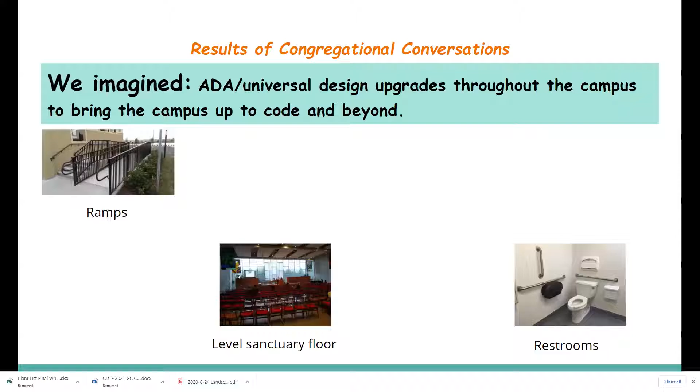So we had conversations with the congregation, and here's what we imagined. First of all, we imagined ADA universal design upgrades throughout the campus to bring the campus up to code and beyond. We imagined more ramps to all of our buildings. We imagined more ADA restrooms than just the one in the main building. We imagined a sanctuary that had a level floor that was accessible from all areas.

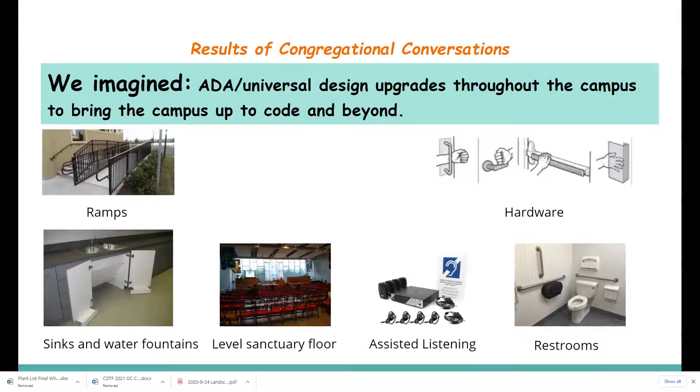We imagined hardware and other upgrades that were accessible. Sinks and water fountains that could accommodate a wheelchair. Assisted listening devices. And a playground for our children. We also imagine an aesthetically beautiful campus that serves our mission. An upgrade to the Jesus window. And I must say, these images are not from our church, but they are imagining into the future.

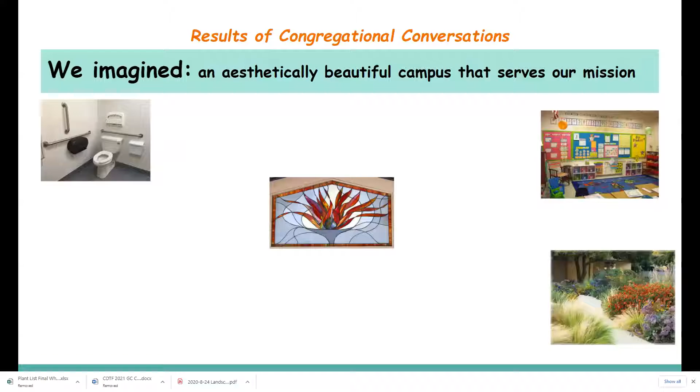Even more restrooms, not just ADA. Wonderful classrooms for our children, but also for the preschool that uses our facilities. Wonderful landscaping, meeting areas and rooms for our youth to meet, an updated social hall, an updated kitchen, efficient heating and air conditioning units, solar panels, storage that was upgraded and really met our needs, painting outside and inside, new signage,

a monitor so that we can better see the hymns and different things during our worship service. Meeting rooms, updated seating in the sanctuary that got rid of our pews and added chairs, which are more flexible in terms of the use of our space. Some art for the sanctuary. New windows that are energy efficient. Let's see, what does that one?

A labyrinth, lighting on our tower, a wonderful entryway, a memory garden, classrooms that could be divided depending upon the size of the crowds gathered, storage in Beck Hall, and finally a new system for our name tags. Then we had a reality check.

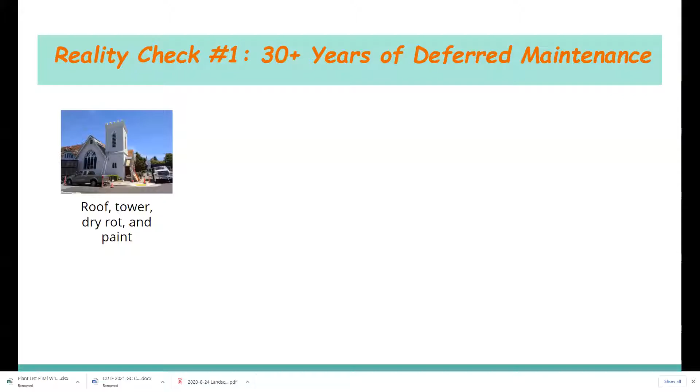Another project would be the stained glass windows. This is a specialty project that's not really within the wheelhouse of most contractors. And these are some of the crown jewels of our sanctuary. And we decided to address these because it was necessary to address some of the deferred maintenance on these, which had not been done in at least 30 years, and address these as a separate project because we knew we would want to get this done anyway.

That project is now complete. The stained glass windows are in the best shape they've been in for decades. And we also managed to replace, if you'll recall, the old diamond motif stained glass windows in the sanctuary and in the narthex, what we called the Harlequin windows, and they now better reflect the overall design of the main windows. That project is behind us.

Talk about prosaic reality. We had a small blockage in the sewer system that developed into a large blockage in the sewer system that developed into the sewer backing up into the RE building. I don't think I can stress that that's not a good situation. We addressed that. This is a project that well exceeded the typical budget that could be covered by the annual facilities budget. And it turns out that the actual blockage, as always, was in the worst possible place, which is in the line buried under Beck Hall. It was an expensive repair, but thanks to Diana Candy, that is complete and all is well.

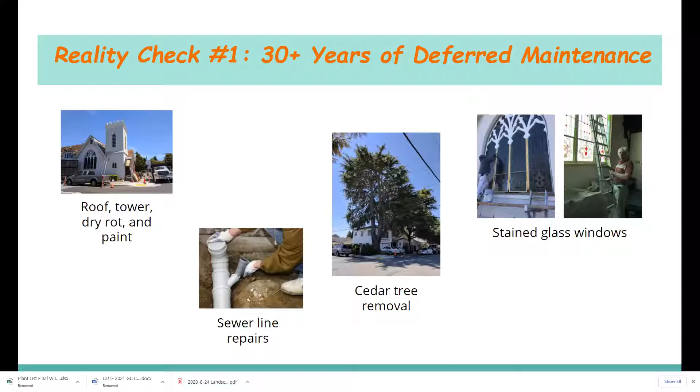The Deodar cedar at the corner of Ramona and East Santa Inez has always been a head scratcher for us. We like trees, but this one had outgrown its usefulness. It was completely out of scale to the building beneath it and any likely building to replace 314. More problematically, it was dropping limbs and it was impacting the roof and putting holes in the roof of 314. And so it really was a safety hazard to life and limb and to the property. And after a lot of discussion and multiple bids, we removed that cedar tree, which coincidentally kind of opens up some of the design constraints that that tree represented for any new building.

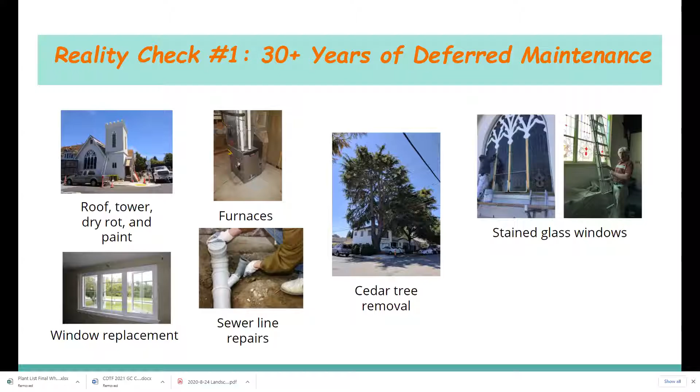We have two furnaces in the basement. Talk about prosaic. Out of sight, out of mind, but you know it when you're cold. The best we can tell, these are original furnaces dated from the 1950s, and it was becoming increasingly difficult to find parts for them, and they were increasingly cantankerous. And the estimate that we have is that they were about 50% efficient. So we just decided to replace them. Again, this is an item that well exceeded the annual facilities budget. And so we used capital campaign funds to do this. That project is now complete, again, thanks primarily to Diana Candide. And we were able to replace them with 2 state-of-the-art furnaces that are over 95% efficient. That project is complete and behind us.

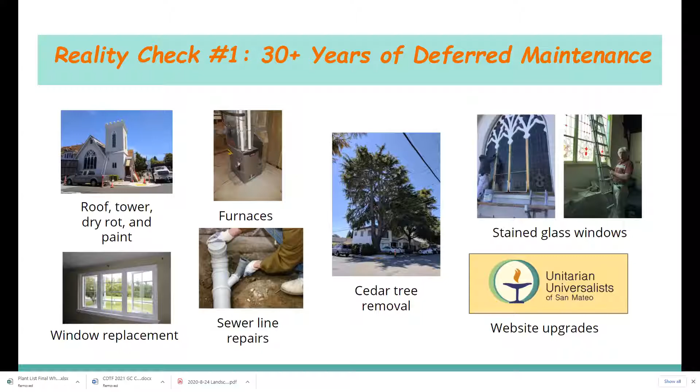We also devoted some funds to the website upgrades, which Sheila Sandow took charge of. The previous website was felt to be a hindrance to communicating with our members and the many changes that we're anticipating. And also it was a hindrance to, we felt, drawing in new members. And so the decision was made to spend some capital campaign funds on upgrading the website because there simply was no money in the budget to do that. All of these projects now are complete, and Barbara will discuss briefly what these items cost and how they are going to impact our budget going forward.

So the other reality check was with 314. Some of you may recall that the original plan was to remodel this building into the Swiss Army knife of spaces, where it could be a rental unit, it could be a minister's study, it could be an intern minister's studio apartment upstairs. We could use it for offices. We weren't sure what we were going to do with it, so we were going to remodel it to be the most flexible space that we could imagine within the constraints of the footprint of that building. We're also planning to build a new minister's study that would be a small but purpose-built facility behind the house where the dilapidated garages are now. That would have something that would be closer to a state-of-the-art meeting space.

The more we looked at this building and the more advice we got from the contractors that we met with was it would cost more to rehab that building and still be seriously constrained with what we could do with it than to just put up an all new building. And so 314 segued into our plans for a new purpose-built state-of-the-art RE building.

Not really going to talk about that in this presentation. It's an entirely separate project. We're really just going to talk about the improvements that we are planning for what we're calling the main campus, which is the sanctuary building, the RE spaces, and the office building.

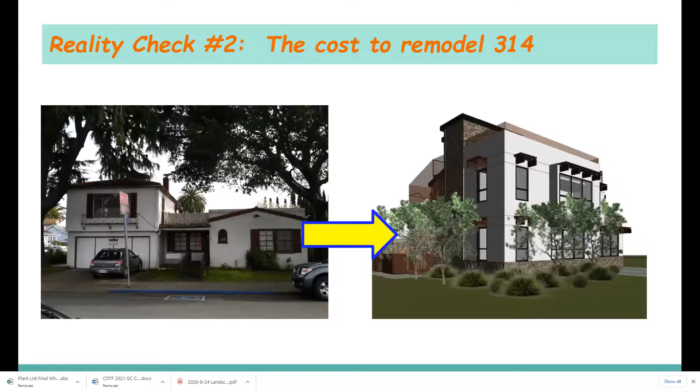Both for budgetary and programming reasons, we're not going to be able to effect the changes that we want to all these buildings at the same time. The permit that we have before the city right now covers all 3 of these buildings, but we have divided this project into multiple stages. And so I'll briefly discuss how we see that going forward.

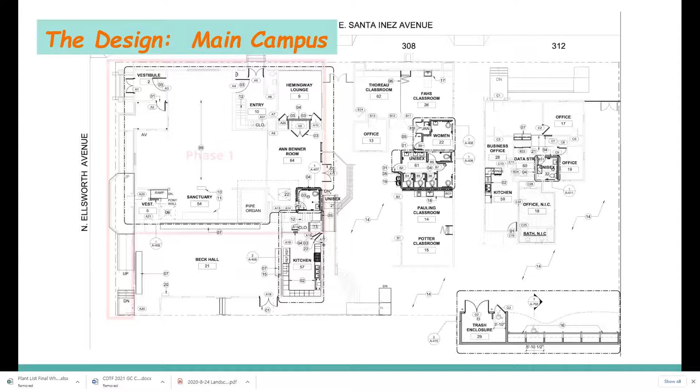The first phase is going to be the sanctuary itself, basically everything except Beck Hall and the kitchen. That's going to be our primary focus. The second phase, or what we're currently calling phase 2, would be upgrades to the office building. It might not necessarily be the second phase that we undertake.

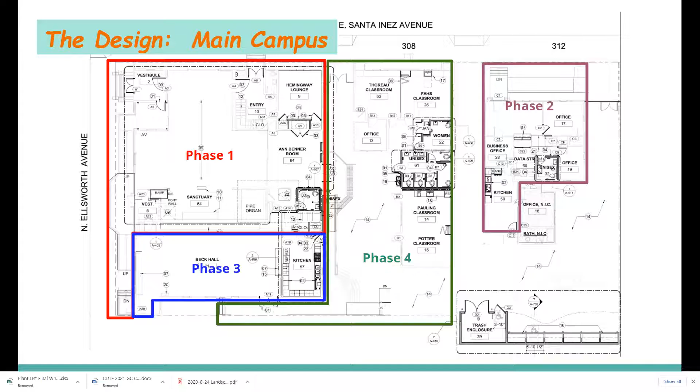The third phase right now is envisioned to be Beck Hall and the kitchen. The fourth phase would be the RE building and the adjacent courtyard. And finally, but not necessarily last, because it could be concurrent with some of the other work, would be the landscaping behind the lot at 312.

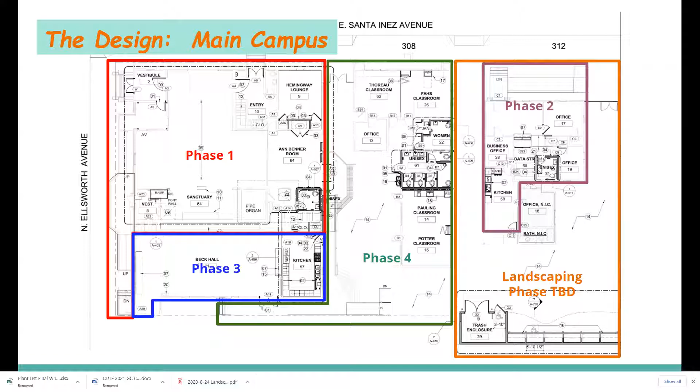And so now Barbara and I will review some of the bullet items that are going to go into these 3 phases to see how your thoughts, your suggestions, your vision for our spaces were incorporated into our plans for these rooms. There are some uncertainties here. There are always uncertainties in construction.

A big one is, when are we going to get our building permit? The permit has been in front of the city for almost a year now. It is a subject of negotiation between the city and us, the owners. This is not unusual, but a lot of this is out of our hands. The city's ability to process permits has been really slowed up by the pandemic. And some of their requirements we think are unreasonable, and we're in negotiations with them to have those modified. We think we're close to getting a building permit, but we don't know that.

Will a phased occupancy of this space be okay? As mentioned, we're putting in for a building permit for all 3 buildings, but we don't anticipate doing the work on all 3 buildings at the same time. That's typically not the way it's done. Will the city allow us to move back into the sanctuary, knowing that the other phases have not been complete? There's precedent for that, but by design, we are not going to ask the city now, because we feel like it would be opening up too many questions that we're actually not able to answer with any specificity right now.

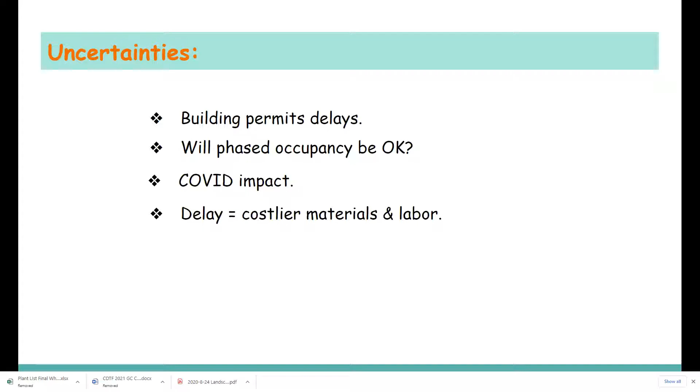The impact of COVID is ongoing: the availability of contractors, the ability of the city to process our permits, and also materials. That leads to delay, and delay leads to increases in materials and labor costs. And finally, how to fully fund our dreams. Because as you're going to see, after we went through the visioning process, our new plan is going to cost more than the funds we have on hand. And we'll talk about that a little bit more going forward.

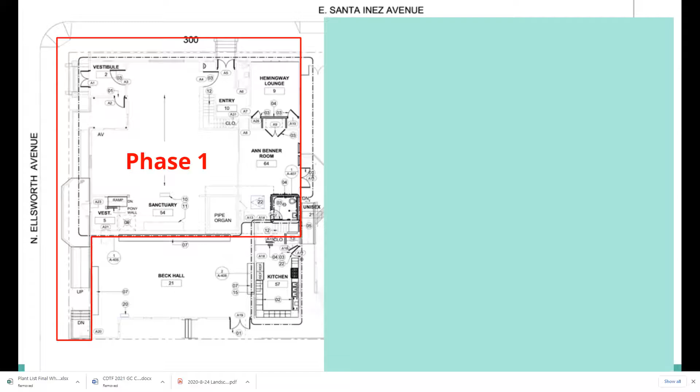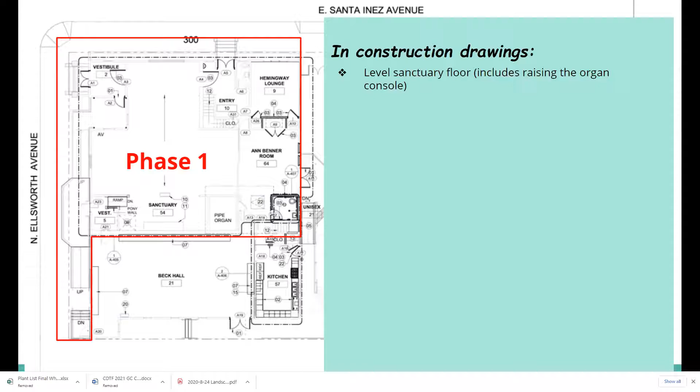Thank you, Barbara. So I'd like to just briefly step you through the main items that are going to go in phase one. So again, the red outlined area is the main building, and that would be encompassed in phase one. A big improvement is to level the sanctuary floor to facilitate a more flexible use of that space, perhaps including things like formal dinners, weddings, and so forth, and just to facilitate different kinds of services for our own use.

ADA is a big driver of this project. Barbara's cursor can show you the large ramp that we're envisioning for Ellsworth. We'll enter into a new ADA powered door into the narthex there. And there will also be a new ramp connecting currently the chancel down to the choir room. Again, that's a requirement to make that space ADA accessible. And we're also going to have another ramp leading from, I'm sorry, it's this one. Yeah, down to Beck Hall from the Ann Benner room.

An early improvement we wanted to make was to put an ADA restroom finally into the main building. We spent a long time, much discussion about where was the best place to put that in the building. And we kept going back to the corner of the Ann Benner room as being the best place. And that is where it's going to go.

Oh, I'm sorry, we've got a delay here for some reason. Oops. Here we go.

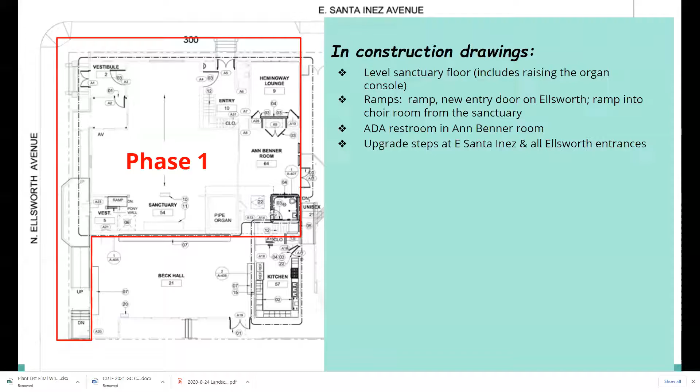We're also envisioning some steps or upgrades to the actual four entrances to the main building. There at East Santa Inez and over on Ellsworth there on the corner, the choir room entrance, and then in Beck Hall. Those landings would be completely rebuilt. So not all will be strictly ADA, but they will all be more ADA friendly.

Storage is always a problem. We are going to claim some of the room in the Hemingway Lounge and put in storage along that wall that's shared with the Ann Benner room. Some of that storage will open into the Hemingway Lounge. Some will open into the Ann Benner room. And this is going to be one of the spaces where some of our tables and chairs and all the other items that we store now under the stairs and elsewhere will go.

Almost everything that's outlined in red there would get a new flooring surface. Won't go into the choices right now. Undoubtedly in the sanctuary, it will be wood of some kind. We wanted to save the existing wood, but that doesn't appear to be cost effective. And the other spaces will probably have a man-made material, but upgraded from what we currently have there. Of course, new lights, new hardware on all the doors and so forth.

Three new automatic door openers. One we've already mentioned entering into the narthex. Another one going out the new entry from the Ann Benner room out onto the courtyard. That'll be a double door. We're going to put a powered door leading from the Ann Benner room down to Beck Hall. And the reason for that has to do with the fact that we cannot find a good way to put a landing in there. So we really cannot have an ADA door without powered access and not have a landing for someone in a wheelchair to pause on.

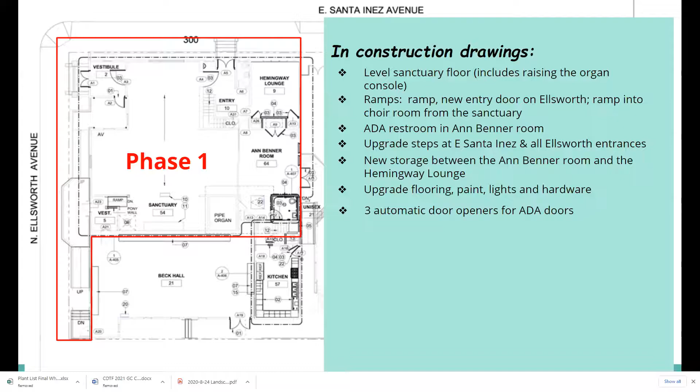So as we go through this, a question you should be asking yourself is, how are these improvements meeting your vision for this space? Do they address what you were picturing? Or are they hitting the items that are important to you? And that's a question you should repeatedly ask yourself. And we would like feedback on that. And we'll take that in the chat and also in your comments after the meeting. As Barbara mentioned, this will be available on the website.

So to do all these things, and again, these are all items that are currently in our construction drawings, the estimated total for that is $750,000. And I should mention, we just got a subsequent estimate in the last few days from another contractor that's about $100,000 more than that. They don't quite compare apples to apples. And because there are a number of unknowns, some of the allowances that are incorporated into these estimates are probably on the high side. But I think that this number gives you a ballpark of what these improvements are going to cost.

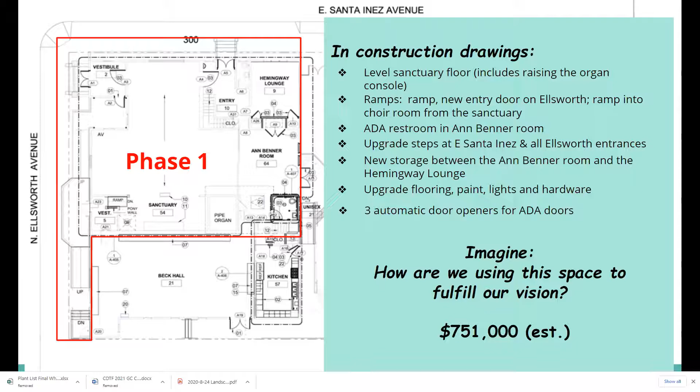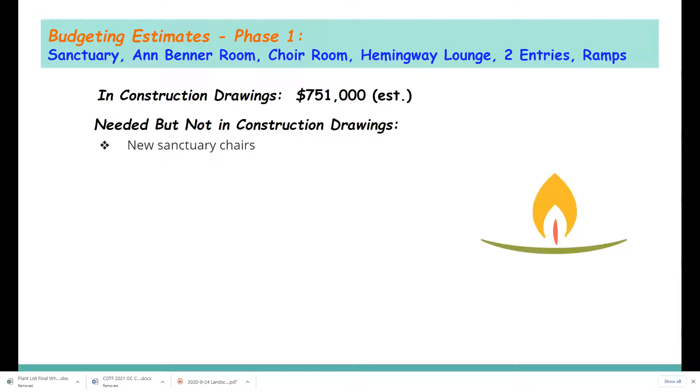However, there are some things that aren't in the construction drawings that we know we want. So again, the estimate for what's in the construction drawings is $750,000. There are some things that we would dearly like to have, and we'll put them in the needed category. That would be new sanctuary chairs. If we're going to raise the floor, we're going to need some new seating. Now, these items are not things that we feel like we need to go to the architect for. These are things that we can do in-house or as separate standalone projects not involving the architect.

We want to upgrade the audio visual in the sanctuary and also the assisted listening, and an upgraded sound booth to replace what's there now. Tom McCune has designed us a new sound booth, and that will get built shortly after the main work is done, or as a separate project to come later.

We need to remove the organ console from its current location so that we can raise the floor there. And then we have to reinstall it. This requires a separate specialty subcontractor. That does not appear in the plans.

To put in the new ADA ramp and the new entrance there along Ellsworth, this sign, the old manual sign that's there now, will have to be removed. And we're envisioning a new electric sign, probably wall mounted in the vicinity there, ideally controllable from the office. So no more manual rearranging of lettering. That will be a separate project.

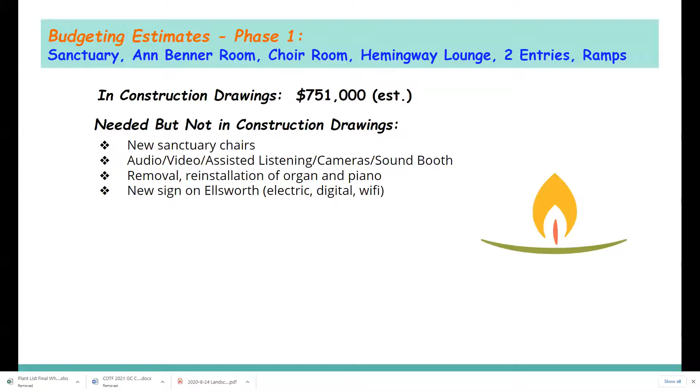And again, if any of these projects appeal to you and you feel like you'd like to get involved in those, we could use some help. We will remove the existing storage locker in the choir room. We need to replace that. The glass in the sanctuary and probably the light elements in the sanctuary lighting will be replaced. That currently is not in the plans. That could easily be a separate project.

Other possible upgrades that are arguably less needed would be everybody's perennial favorite, the Jesus window. We just don't want to tackle that one right now. We've got some ideas, and we're not going to make any changes there without engaging the congregation. Don't worry, but it is on our radar, as is

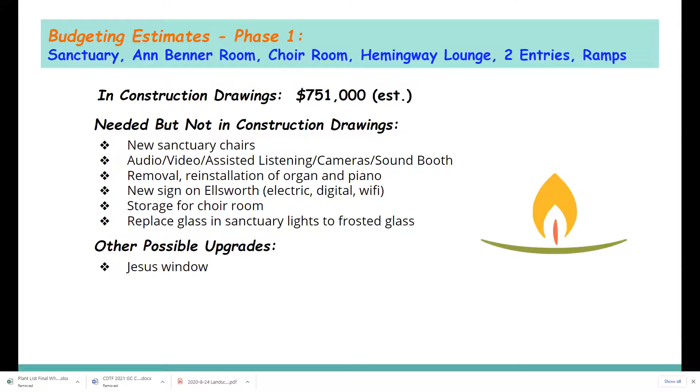new doors, new exterior doors from Ellsworth and Santa Inez. It might surprise you to know that they are not in the plans currently. That is by design. That is after lengthy consultation with the architect. We know we want to replace those doors. We will replace those doors, but for reasons that are sort of beyond the scope of this discussion, they are not in the plans right now.

We have plans, as Barbara briefly mentioned, to put some exterior accent lighting on the tower. The infrastructure, the mounting hardware to do that, we incorporated as part of the roofing project when we redid the shingles on the tower. That was the time to do that. And so that is a project that's waiting to move forward. We also have a plan to possibly backlight the stained glass at night. And both of these would be to create a much more vibrant and inviting presence of the church into the community.

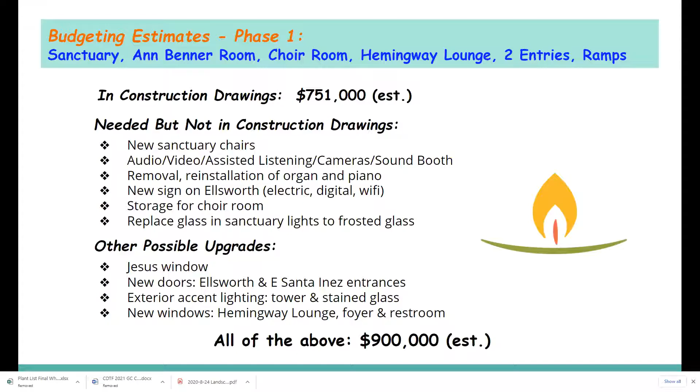We have not yet replaced the windows in the Hemingway Lounge or in the bathroom adjacent to the Hemingway Lounge or the little foyer window adjacent to the entrance there. We would like to do that, but that could be a standalone project sometime in the future. It is estimating the cost to do everything you see above there, plus the previous $750,000, would be approximately $900,000. That's phase one, and I'm sure you have questions. But now Barbara will take us on into phase two.

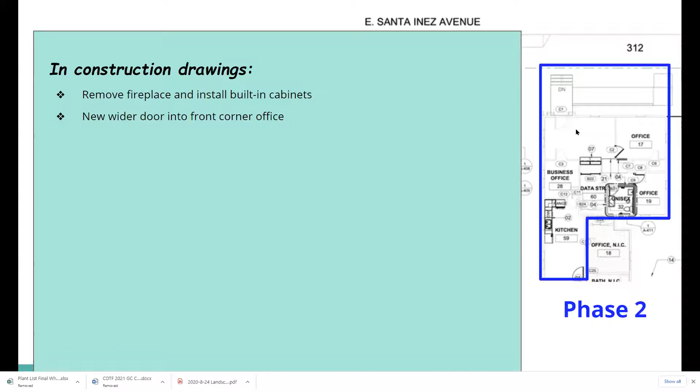The other thing that we'll be doing is we'll be changing out the door to this front office. Right now, the door is here and it's fairly narrow. We want to add a different door here that is wider to accommodate wheelchairs and also is a more direct route from our entry area here. We will have a new ramp in the front yard that is up to ADA code. New floor in the restroom, which is here, and in the kitchen and the hallway that is adjacent to this restroom.

There's a doorway here between the front office and this hallway, and this is not ADA standard, so we will be widening this doorway. Here is a small restroom that also is not up to ADA standards. We will be increasing the size of that, and in doing so, we will have to move this wall about a foot into this office space. And this is the new ADA kitchen here that will have a lower sink, and also it will have room in the kitchen area here for a better meeting facility.

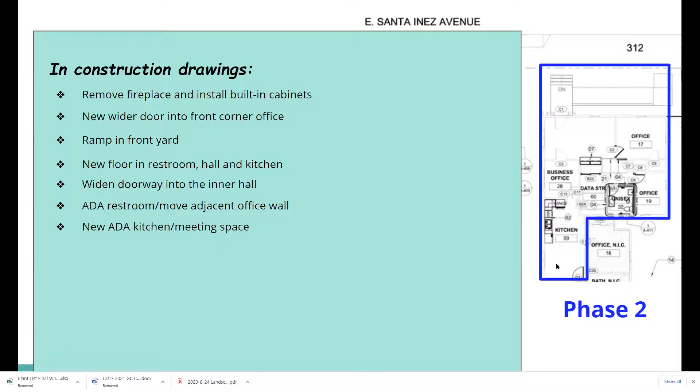It is our intention to eventually take this front hall entry area and take the lounge chairs and things out of it, because we'll have meeting room elsewhere, make this into the main office area, make this into the place where we have our machines and our storage, so that we can open up the kitchen area then for meetings and conversation. Interior painting throughout. And again, imagine how we will be using the space to fulfill our mission and how it will serve the mission into the future. So our estimated cost for this part of the project is $343,000.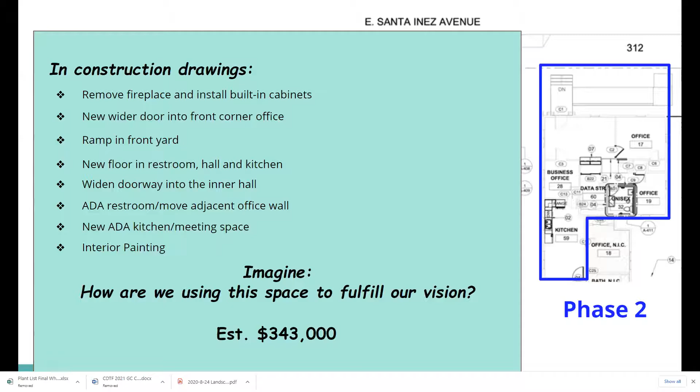So here we are, our construction costs in the drawings, $343,000. Possible upgrades. We didn't anticipate that there would be any necessary things that we would have to do during the construction phase. However, we all know that things do pop up during construction that may necessitate that other category that Roger was talking about, which is necessary but not in the drawings.

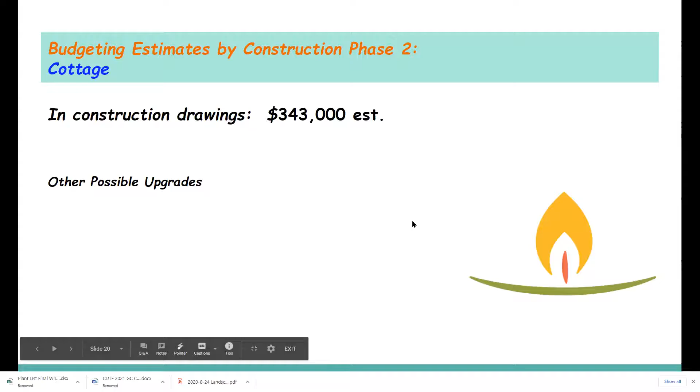But other possible upgrades that we're looking at are new double pane windows, solar panels, exterior and interior painting and repairs. And the overall estimate for these upgrades is $400,000. Again, what will be our legacy? I'll turn this back over to Roger.

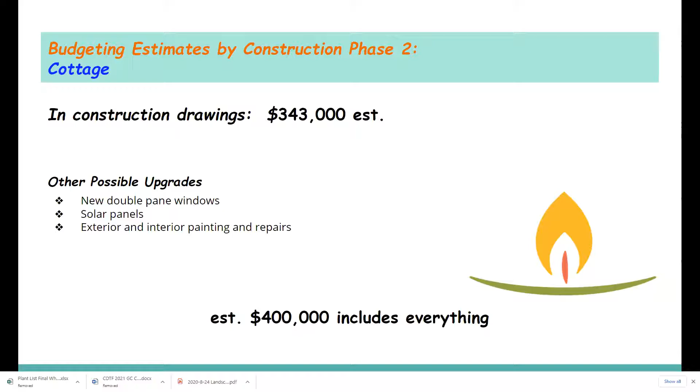Okay, but wait, there's more. So returning to the main building, what we're calling phase 3, but it might be moved up in the priority. This is Beck Hall and the kitchen. So again, we have what's in the construction drawings, and that would include removal of the loft and repair the walls once the loft comes down. This will open up the view towards that main window along Ellsworth there. And the loft is underutilized now, and it was an afterthought when the building was first constructed. And we're going to remove that, and we think improve the overall aesthetic and usability of the space.

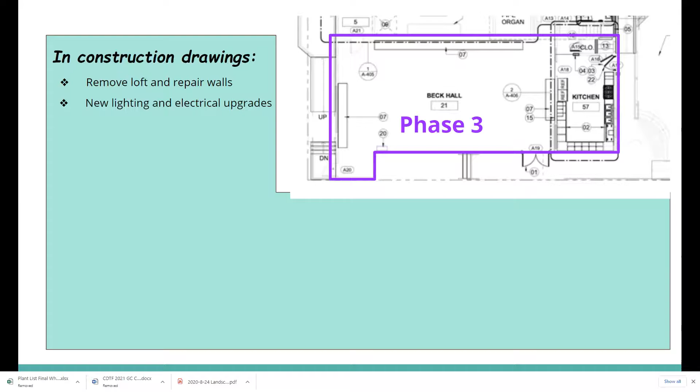New lighting and electrical upgrades. We'd like to replace all the lighting that's currently hanging from the rafters. Those were afterthoughts, it's quite clear. We have some plans for some thoughtful and more flexible lighting that will improve the lighting and be more attractive at the same time. Barbara will point out some areas where new cabinetry would go. One is under the main window there along Ellsworth. Some large cabinetry along the wall shared with the sanctuary, and then more cabinetry along the wall shared with the kitchen. The design of this is TBD, but this is where our chairs and our tables and our kitchen linens and so forth are going to go.

We're going to modify the heating vents to make the room more comfortable. Right now, they're all along the one wall. We're going to distribute them more evenly around the space so that we get better heating. And again, this will facilitate the possible use of the space for rental activities. It's currently planned to put some ceiling fans, probably hanging from the rafters. And this will better circulate the warm air from the tall space down to where the people are, and again, make the room more comfortable. We've got some acoustical panels high on the wall shared with the kitchen. They're not attractive. We probably do need some acoustic moderation in the building when we're done, and we will replace that with something more aesthetically attractive and probably more effective. Paint, that's a big duh.

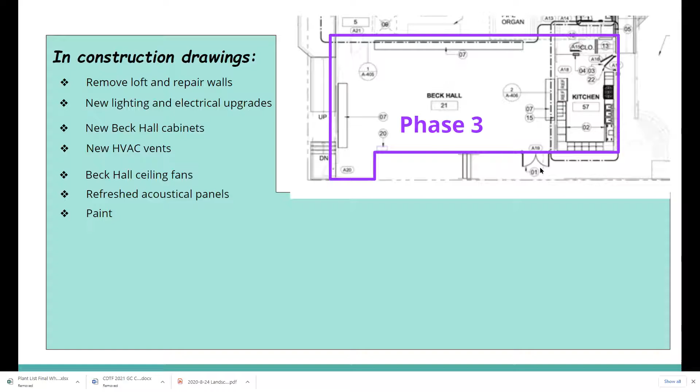We also want to upgrade the door leading out the back to something that's more ADA compliant. Not part of phase 3, but eventually there would be an ADA ramp leading out from those doors down into the courtyard. All right, I think that's the last item. This one's a little esoteric. Take some explaining, but Barbara will circulate the cursor there. Right now, the entrance to the basement is through an outside door in the courtyard. The plan is to remove that door and enter the basement through a door in the kitchen there near where Barbara's cursor is.

This requires removing the small bathroom that's there in favor of the stairs, and that would also allow us to rebuild the custodian's closet there into something larger and more accommodating. So we would lose that small restroom, but keep in mind, we're going to have a large brand new ADA restroom just on the other side of that wall in the enter room. So we're not going to be losing bathrooms. So the estimated cost to do these items that appear in the construction drawings is approximately $400,000. So again, the cosmic question here is, how do these improvements conform with your vision for the space and how you see us using that now and in the future?

I want to jump in here, Roger, only because I see that something is off of our list, and that is a total remodel of the kitchen. There's a wall here that our refrigerators are against. There's a little janitor's closet there. Our idea is to tear out this whole area and start anew. The only thing that will be left is the vent over the stove.

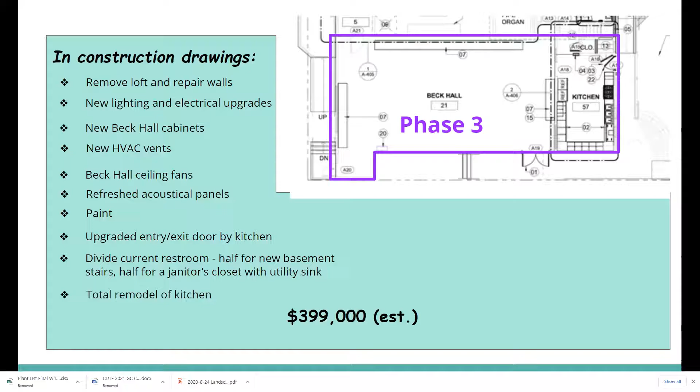Yeah, that's a pretty significant omission. Yeah, I'm not sure how that dropped off the slide. Oh, there it is. It just got in the wrong order. Okay, thank you, Barbara. All right.

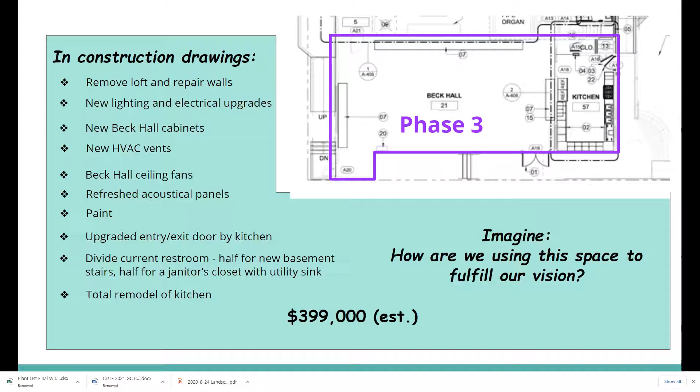So again, that's what's in the construction drawings now. As always, there are things that we really, really would like to do that aren't encompassed in the plans or in that $400,000 budget. And that would include, needed but not necessarily in the drawings, an additional entry into the kitchen between Beck Hall and the kitchen. This would be where the current pass-through is.

Right now, everyone that gets in or out of the kitchen has to go through that one doorway. When we have large dinners, we're constantly bumping into each other, and it's just not very efficient. We have a plan to put a doorway in where the pass-through is. There'll be a net gain of storage, so that's not a problem. And this will significantly improve the circulation from Beck Hall into the kitchen. You can have a circular pattern going through the kitchen into Beck Hall and back into the kitchen. It will greatly facilitate accommodating dinners and large meetings in Beck Hall.

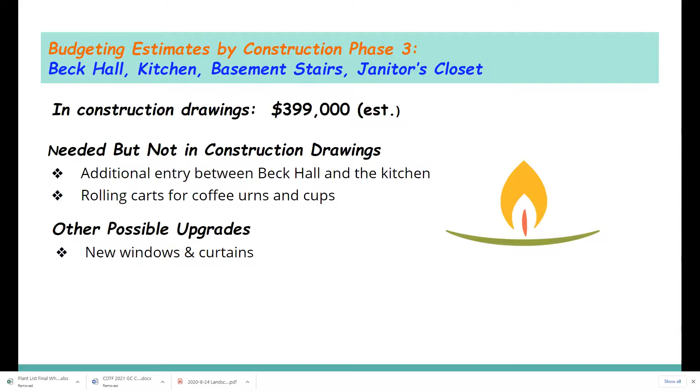We'd like to have some rolling carts for the coffee service items. These would probably be stored in some of the cabinetry that Barbara pointed out on the plans, but they're not in the architectural drawing. Other possible upgrades that perhaps are a little more arbitrary would include new windows and curtains. What we have there is original construction. We would dearly love to mitigate the ugliness of the fire sprinkler system. It would also probably include changing out the control panel, which very few people have actually seen, but it lives in the basement right now. It's somewhat problematic, and we've been advised we probably would want to replace that at some point in the future.

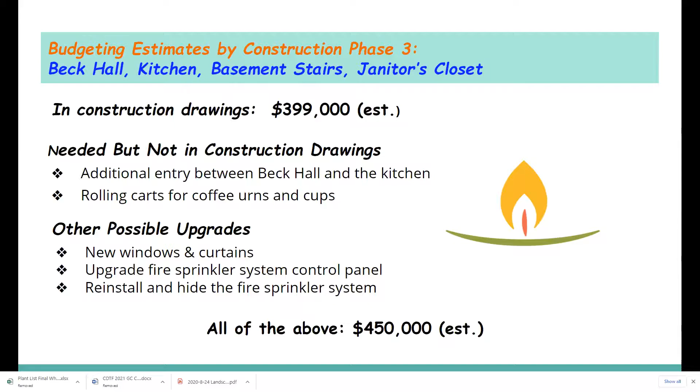And of course, actually, the next item is hiding the sprinkler pipes that are in Beck Hall. And that's one that's near and dear to me. So if we include all those items with the $400,000, we're looking at possibly $450,000 for what we're calling phase 3.

So we move into phase 4. And phase 4 construction cannot happen until we complete the building at 314. Reason being, for one thing, it will take away some of the classroom area that we have now. But even more importantly, we need to move the preschool into the new building before we can start the construction here. We don't want to disrupt their program. And also, every inch of the courtyard here is included in their license. So we cannot add any structures to the courtyard until we move the preschool.

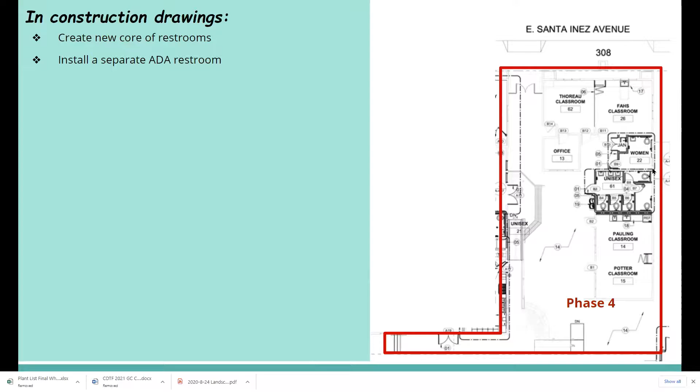So what's included in the drawings? We will be creating a new core of restrooms. We'll be taking away classroom space in order to do that. We envision 5 different restrooms, at least one that's a child height toilet with different heights of sinks. We will also be taking out the 2 smaller restrooms that are here, and we will be creating an ADA restroom. Not only will we be installing ADA height sinks, we will also add an outdoor drinking fountain.

We have 2 small classrooms up here at the top near Santa Inez Avenue with a double doorway here. However, these 2 classrooms are very, very small and do not really accommodate our class sizes, which are a little larger. So we anticipate taking out most of that wall and replacing it with a folding divider of some type, so that if we do have smaller meetings, we can actually close off those 2 rooms.

The other thing that we will be doing: right now, there is a solid wall here. This is classroom space, and over here, Sophia, our Montessori school director, has her office. We'll be removing that wall and again putting a partition in here so that we can either use the larger space or divide it into 2 smaller spaces. There will be flooring upgrades throughout.

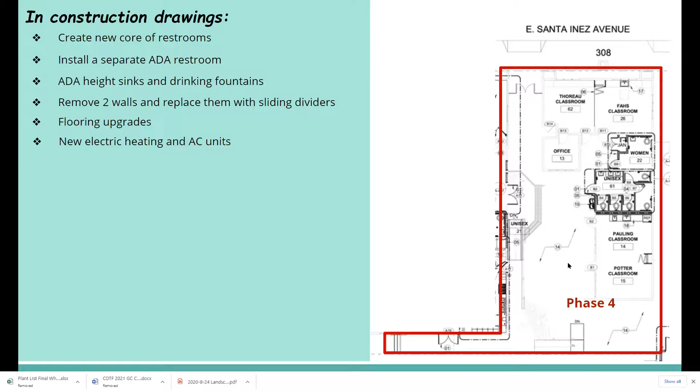We would like to install new energy efficient electrical heaters in each of the rooms. These units also include an AC, air conditioning aspect to them, so that as our climate gets warmer, we will have air conditioning capacity in that one building. We will do painting throughout the interior.

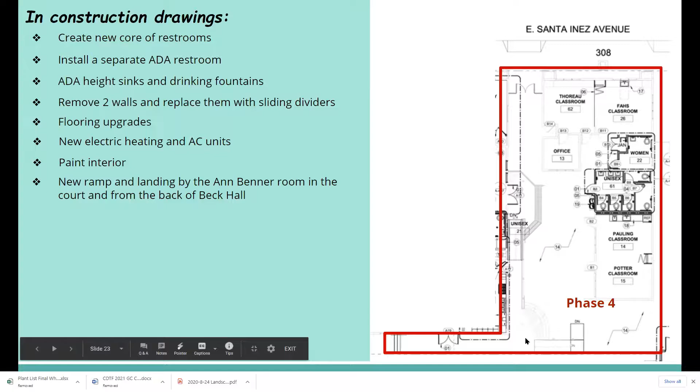We'll have new ramps and landing from the Ann Benner room here into the courtyard. So this will be a new landing area right outside the doors, and we'll have a ramp that comes down here. We'll have decking around the magnolia tree. We have to have decking above the roots of the magnolia tree. At the same time, these doors out of Beck Hall will now have ADA access, and there will be a ramp down this way, joining this decking and then further ramping into the courtyard.

In the courtyard right now, there is actually a step along the front of the RE building. And because of that, it is not accessible by a wheelchair. So we will be raising the level of the courtyard to the height of that step so that we have ADA accessibility into that building. To add a decorative feature and also some weather protection, we will be adding a trellis along the walkway here with a covering over the entry here.

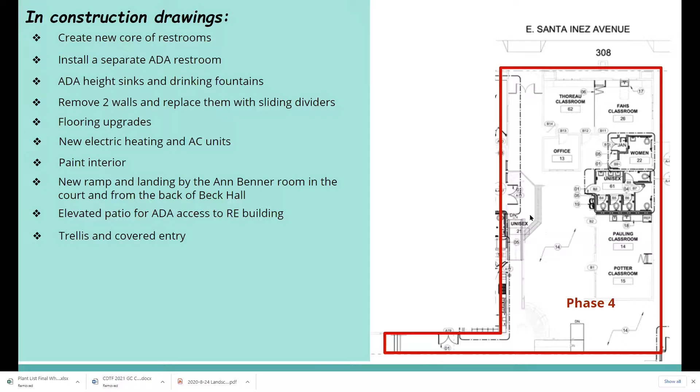So imagine how we are going to be using this space in the future. We imagine the little decking here will be a wonderful stage for our kids or anyone else who wants to make a sermon or do a show from our courtyard. This will also be a wonderful stage. But more importantly, this entry will be really inviting, and may become one of our main entrances into our building.

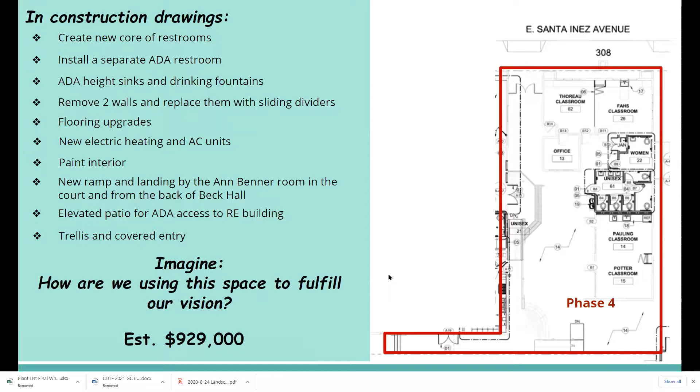And what cost does this come at? Right now, we're estimating that it's going to be $929,000. A large number, I know. So here we are. In the construction drawings, the estimate is $929,000. What other things are we going to need?

Furnishings. Some of the space might become conference room space. We might need tables and chairs for that. It will accommodate our high schoolers. We're not able to put the high schoolers in the new building for parking issue reasons, so this will become their new space. Other possible upgrades: double pane windows and shades. Currently, they are only single pane and very energy inefficient.

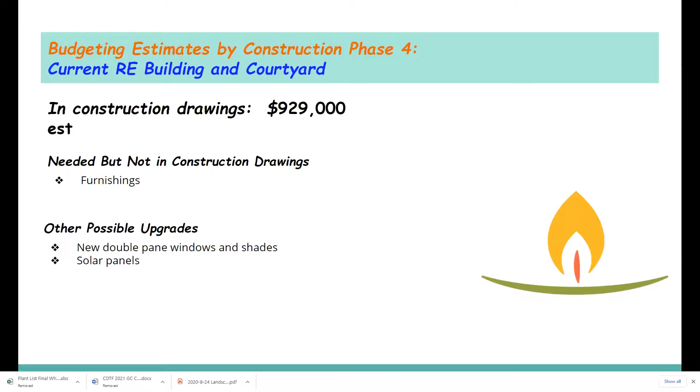Solar panels. We'll look at their roofing structure to see if the structure can handle solar panels. Exterior painting and repairs, including the upgraded facade on East Santa Inez. All told, we think that we're going to need about $1 million for this phase of the work. This phase will come several years down the line. However, as I said, we need to construct 314 before we can do the work of this phase.

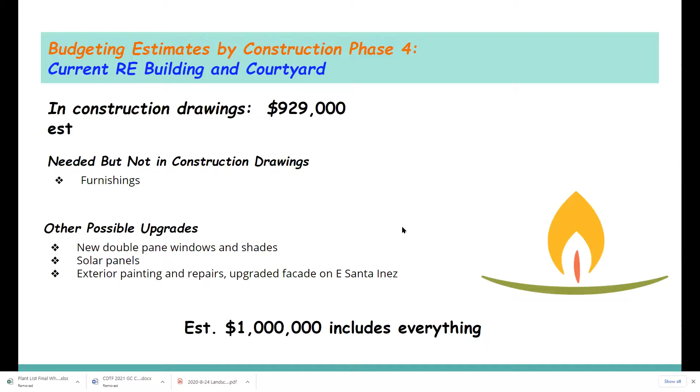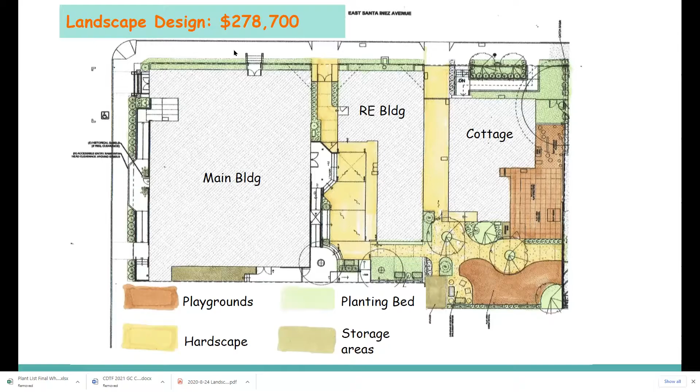With furnishings, we're estimating 1.8. However, I did talk to a construction expert, David Kramer, recently, and he thought that our estimates per square foot of the RE building may be a little bit low. So we could need up to about $2 million to construct the RE building itself and to upgrade the landscaping around it. Note, these are big numbers.